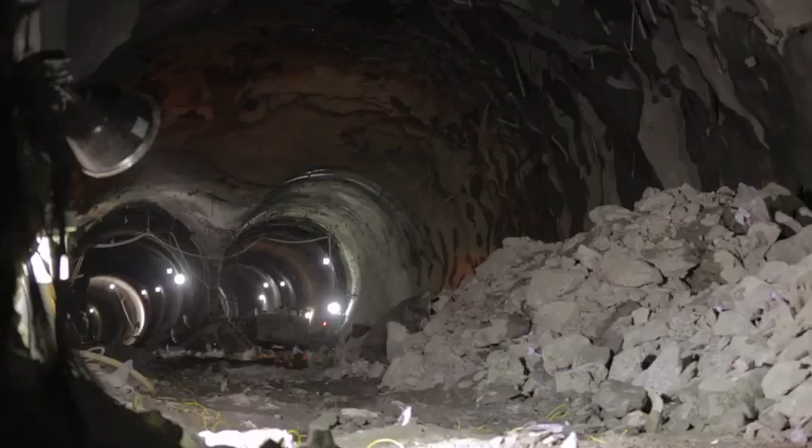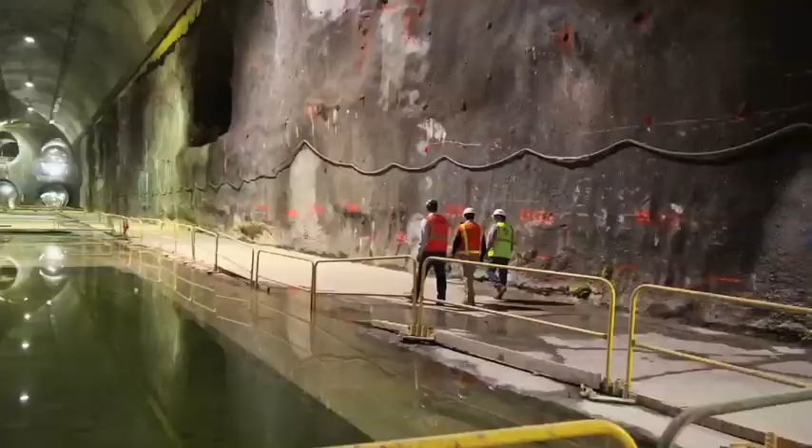East Side Access is a great accomplishment. It's one of the largest construction projects in the country, if not the world. Very challenging, above ground, below ground, interacting with the existing railroad, the DOT, all the traffic operations, the community, the agencies.

Every weekday, 230,000 Long Islanders use the train to commute to Manhattan. They travel to Penn Station on the west side of Midtown. Nearly half of these people proceed on to their workplaces on the East Side. This bold program creates a direct rail connection that starts at the existing Sunnyside Yard in Queens, proceeds under the East River, and runs for more than 20 blocks beneath the streets of East Side Manhattan.

Very happy that we're finally finished, and it was a great accomplishment. This will change the lives of many people once this project is complete, which is several years down the line.

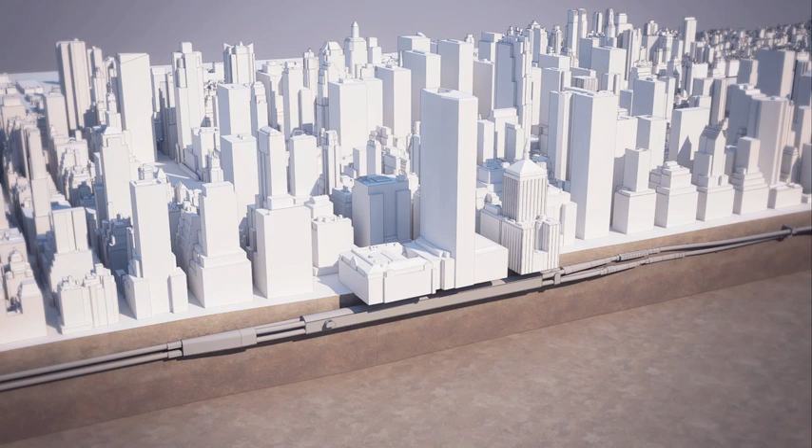The Manhattan Tunnels and Structures contracts, two of the largest for the East Side Access Project, were awarded by the MTA to DRAGADOS USA. The projects run under Manhattan from 63rd Street and 2nd Avenue, tunnel under Park Avenue and Grand Central Terminal to East 37th Street.

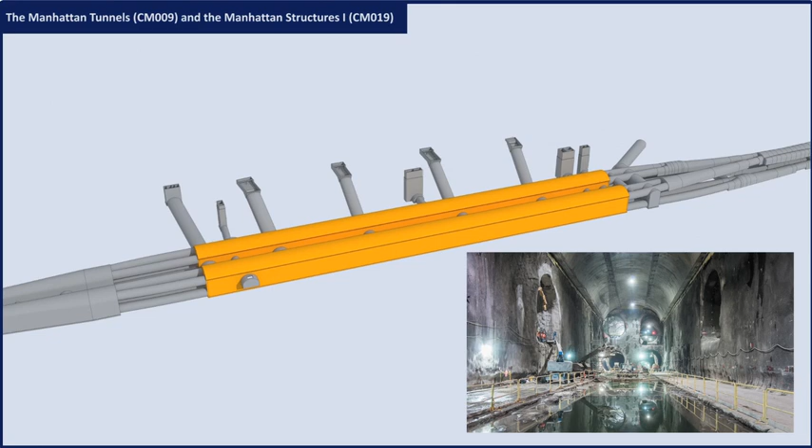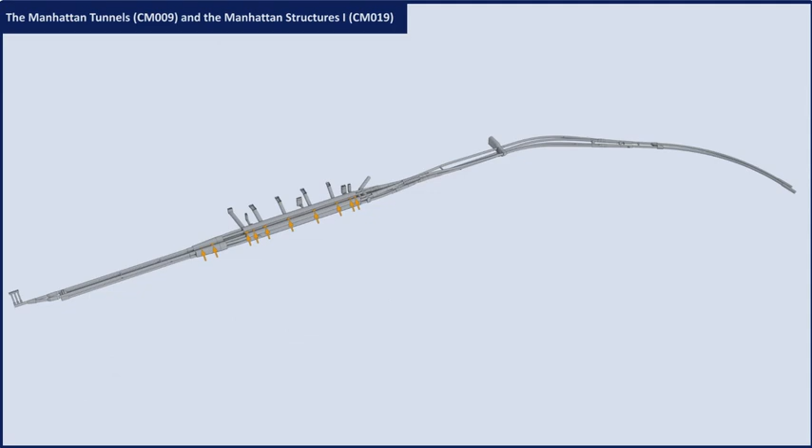The project entailed the excavation and/or initial support of over 32,000 feet of tunnels with 22-foot diameters, two large caverns about 70 feet high, 60 feet wide, and 1,143 feet long, two double-level and six single-level 400-foot-long Y caverns, two 350-foot-long crossover caverns, three double-level ventilation plenums, two assembly chambers, 10 connecting tunnels, and 10 cross passages. The work also includes the concrete and shotcrete final lining of certain tunnels, as well as the inverts of 4 Y and 1 crossover cavern.

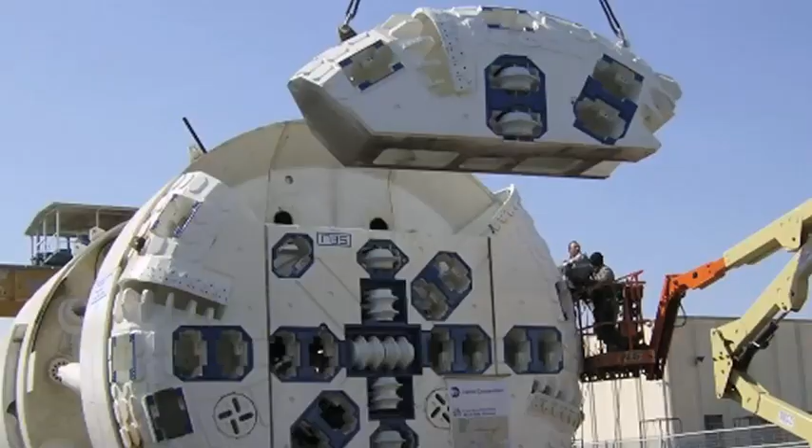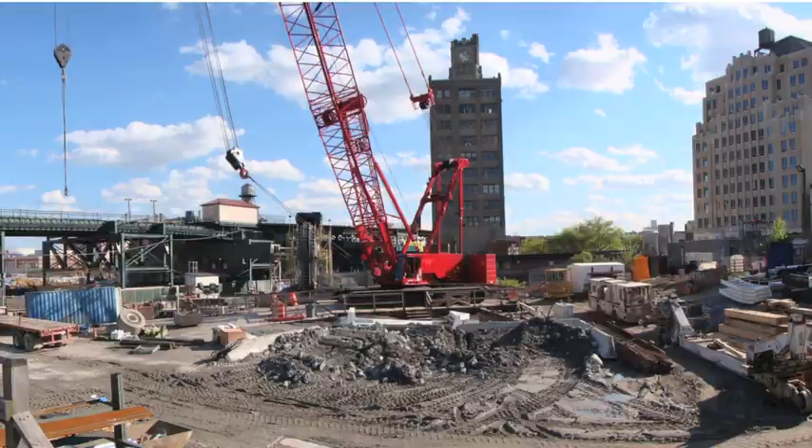The running tunnels were excavated with two 22-foot diameter TBM machines, one double-shielded machine and one main beam machine. Both were assembled in two assembly chambers, excavated by drilling and blasting under the intersection of 63rd Street with 2nd Avenue. The access to the assembly chambers was through two existing tunnels, excavated 30 years ago. These tunnels were accessed from the Bellmouth Shaft in Queens, 1.6 miles from the assembly chambers.

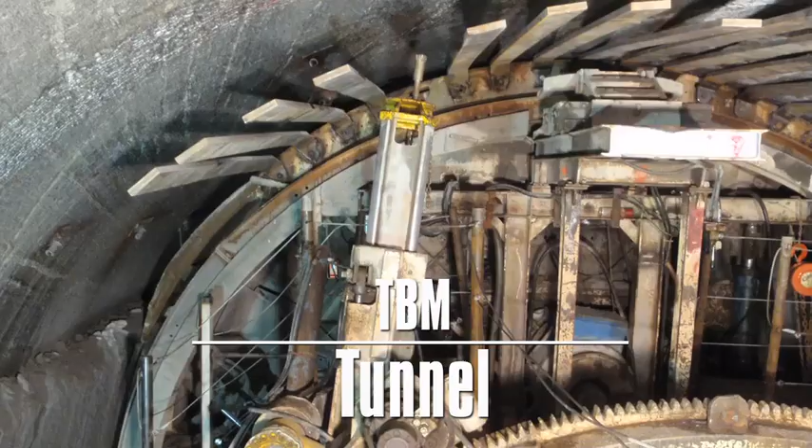Each TBM excavated approximately 16,000 feet of tunnel, with 4 different drives performed by each TBM. Each driven TBM tunnel consisted of a forward drive, a retraction of the machine through the completed tunnel, the placing of a concrete plug in front of the machine, and the redriving of the machine through the concrete plug in order to redirect the machine to the subsequent TBM tunnel excavation. About 2,500 feet of cast-in-place final tunnel lining was placed subsequent to the TBM drives.

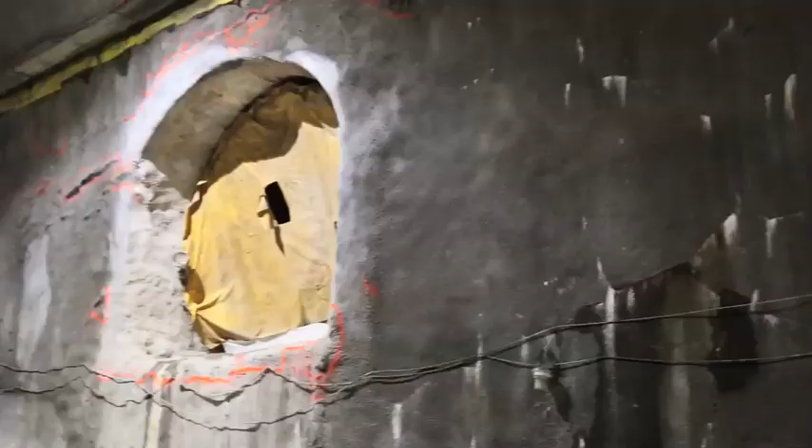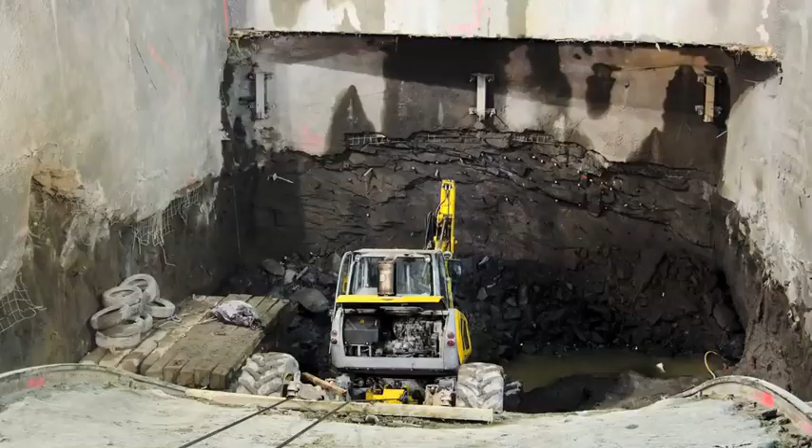In order to connect the new station's caverns with the new Grand Central Concourse level, 4 major escalator incline shafts, 37 feet wide, 22 feet high, and 150 feet long, as well as 4 90-foot deep vertical shafts, were excavated and lined. The excavation of the incline shafts was performed in 2 stages. The first stage required mechanical excavation to a depth below the existing train shed foundations. The second stage of the excavation utilized drill and blast methods to complete the incline. Mucking was accomplished utilizing a Menzi Muck excavator and side discharger muck cars.

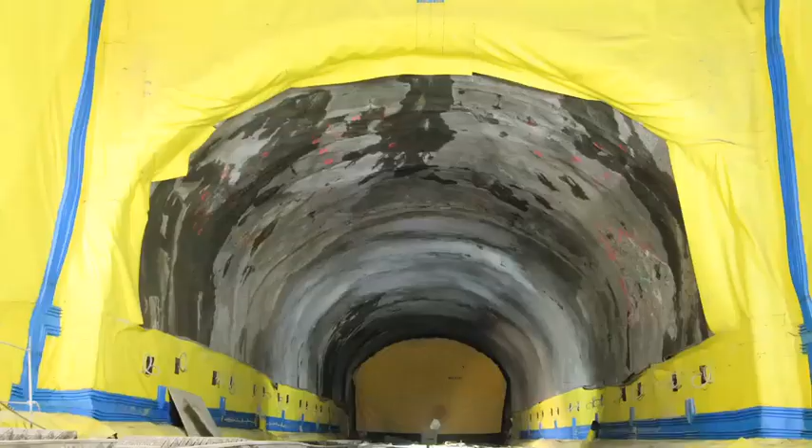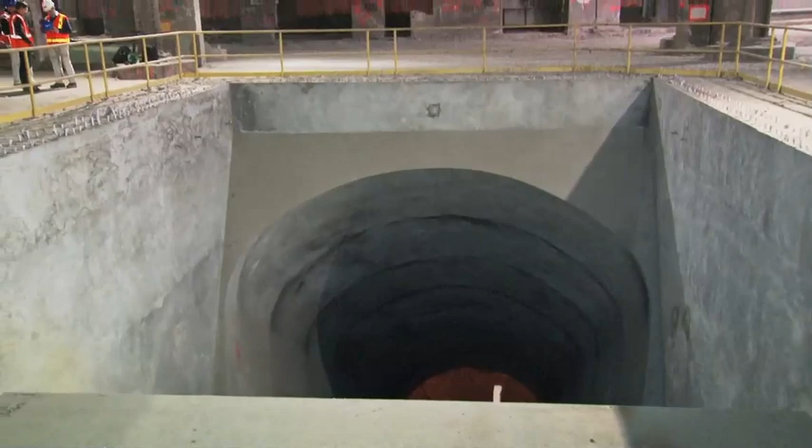Bolting and shotcreting provided initial support of the excavations. Waterproofing, rebar, and shotcrete placement completed the final lining procedure. For the excavation and final lining of the 4 vertical shafts, a rolling gantry crane designed for vertical shaft operations was installed. The vertical shafts provide the required space for the elevators and ventilation systems that will service the new Long Island Rail Road concourse level.

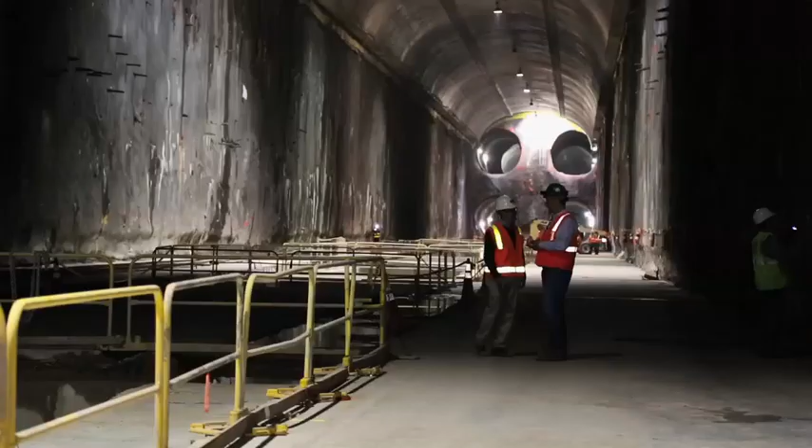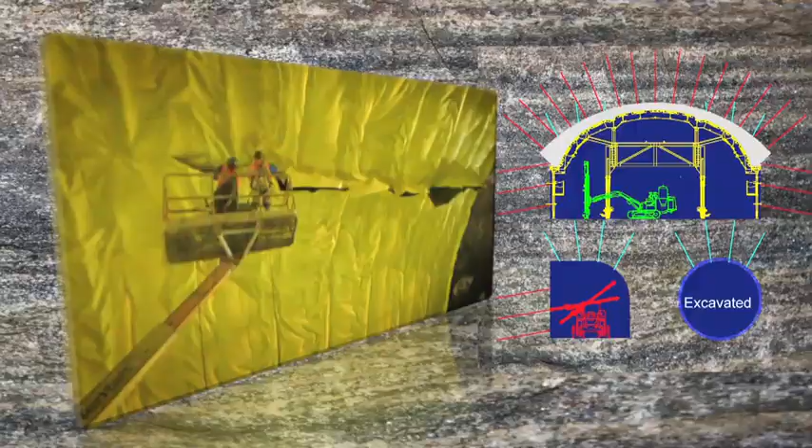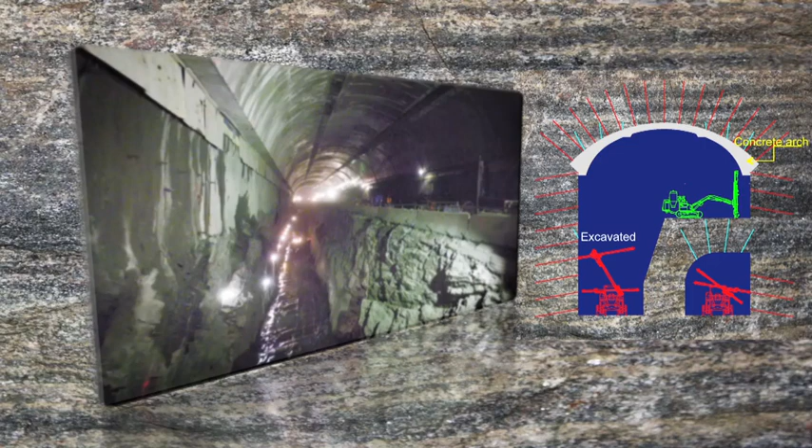2 new 67 feet high, 58 feet wide, and 1,143 feet long Grand Central Station caverns were also excavated in multiple lifts. After the TBM excavation through the station's caverns, 80,000 cubic yards of top-heading excavation was performed in 3 drifts, using the road header as well as drill and blast techniques. The top-heading arch, 58 feet wide and 1,143 feet long, was waterproofed and concreted. 105,000 bank cubic yards of bench and lower central pillar were also drilled and blasted in 2 lifts.

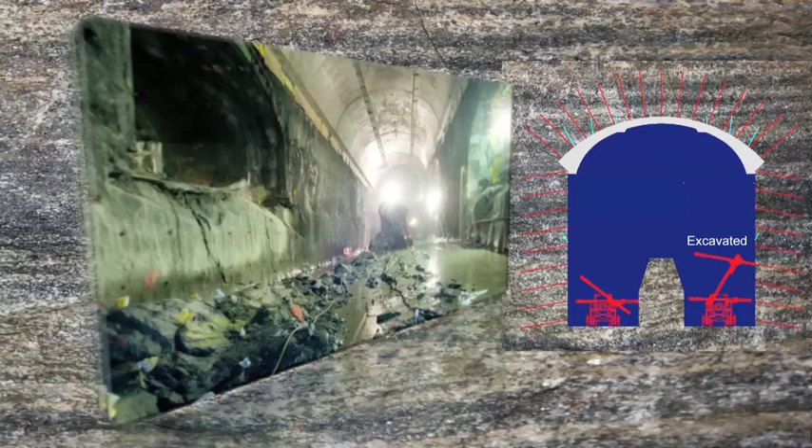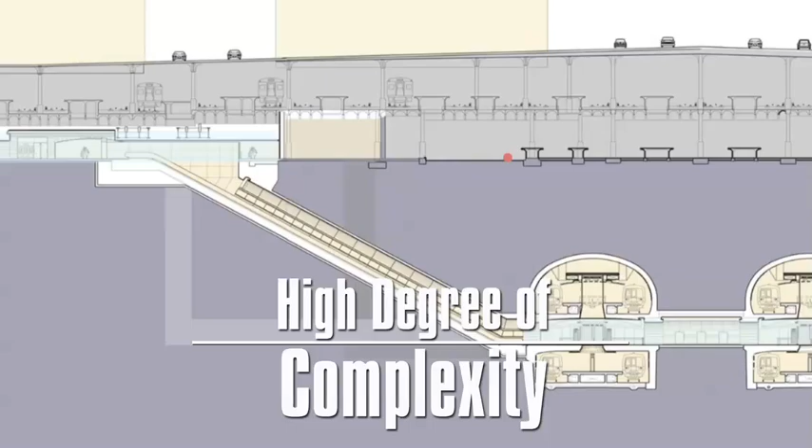The cavern rock removal was completed with the excavation of multiple pits in the inverts of each of the caverns, required to provide housing for the multiple escalators and elevators that will eventually service the future train platforms. Concrete placement was required at the invert of each pit. The cavern excavations had a high degree of complexity due to the proximity of Grand Central's Metro North trains, resulting in restrictive blasting criteria and windows. The new Grand Central Terminal Station caverns have been excavated 90 feet below the Metro North Railroad tracks.

The extraordinary challenge of the East Side Access project is that it has to be excavated while keeping Grand Central Terminal and other critical structures throughout the east side of Manhattan functioning 24/7. In 2010, the East Side Access project performed by DRAGADOS USA and its affiliate company, Schiavone, won the Project of the Year Runner-Up Award in recognition of an outstanding tunneling project undertaken under difficult urban, logistic, and geological conditions.

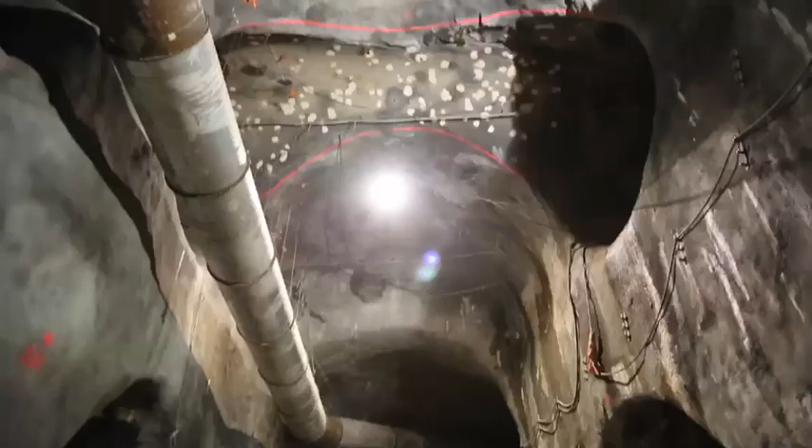We are building a station with elevators, escalators, Y caverns, crossover caverns, tunnels, all underneath the biggest metropolis in the world, New York City. All the while, never disrupting what's going on above us.

In June 2013 and October 2013, the work on CM009 and CM019, respectively, achieved substantial completion as required by the Metropolitan Transportation Authority. DRAGADOS USA and its affiliate company, Schiavone, have been able to successfully execute one of the largest public works projects ever undertaken in New York, the East Side Access Project.